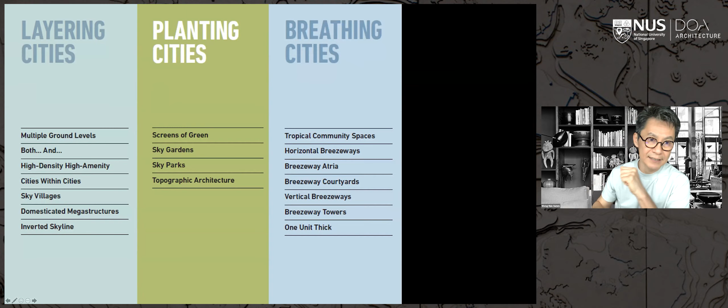Breathing cities is something I talked a little bit more about in the first lecture, that is how we create a breezy and pleasant microclimate within our buildings. We have quite a bit of this explained in the first lecture, but I will talk about breezeway courtyards later in this lecture.

But the last chapter, called Rating Cities, is very important to us. We created 5 ratios. We think these 5 ratios can have a catalytic effect on cities if we start measuring this. So often, we use ratios like GFA, site coverage, floor area ratio. These indexes are very often used, but they may be a bit more related to real estate, and they don't tell you whether or not the building is a good building, is a good city, is a good master plan or not.

So we thought about what we can actually come up with that hopefully developers and cities can adopt, and create an environment that encourages the purpose behind these ratios. I will show you how it has reflected in our buildings, but the good news is that such ratios have been taken up by a few cities in the region. In Taiwan, Taichung has taken up some of these ratios and it has had a very good impact on their cities.

Even in Australia, Brisbane is looking at some of these indexes and hoping to implement some of them to encourage developers to do good buildings. In fact, a lot of developers come to us because of these ratios, and they want to actually do good. So some of these enlightened developers are getting onto the bandwagon and wanting to do good for the environment.

Civic generosity is the more difficult one. It's about how the development encourages and facilitates public life in the city. Ecosystem contribution index is the degree to which development supplements the city's ecosystem. And the last one, self-sufficiency index, is a development's capacity to provide its own energy, food, and water.

This one is a very important one in today's climate, where we are going through a pandemic, where our supply chains are affected, we can't travel. The topic about whether or not cities and countries can be self-sufficient is something that I think has got heads turning and people discussing it.

So just to recap some of the projects I explained earlier and how they rate with our own ratings. We did these ratings also to push ourselves, so that the next project that we do must be at least better than the last. We don't like to stay put, but we like to always constantly push the agenda and do better. And so this was the basis for us to measure ourselves.

So this SOTA, as I mentioned earlier, what is interesting is that the community plot ratio is high because, as I was saying, this was a cheese building. We were creating a lot of volume, a lot of anti-mass, or negative mass, basically a lot of voids, and these voids were actually social condensers, learning and teaching spaces for the school. And you can see the percentage of it being 220%, 2.2 times over the site area.

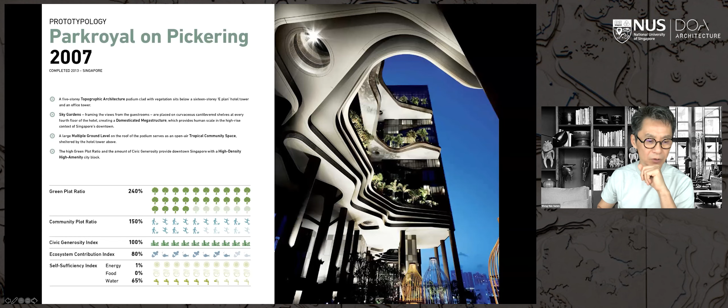So Parkroyal on Pickering, again, you can see the green plot ratio is very high. That's why it's quite a darling of the media for greening, not so much for sustainability, which is intended, but just integrated landscaping. There's a lot of greenwashing, and now green design seems to be an ism about how much green you can have in the building. And it's a bit disappointing. I do hope that everyone in this webinar understands that green building is about sustainability. It's a holistic, integrated, sustainable strategy that we are driving at.

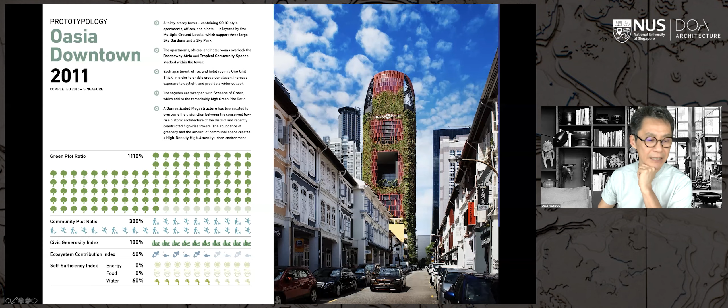And I think this is quite important because city planners crunch a lot of numbers. They tend to lack the three-dimensional quality of what buildings and architecture can contribute to the bigger picture, to the city scale. So one of the chapters in our book is called prototypology, where we see every building of ours as a new prototype. And when scaled up, it has a certain impact in the city.

So this is the Singapore Pavilion at the World Expo. It was meant to open last year, but due to the pandemic, it will open in October this year, in 1.5 months' time. It's almost finished. It's quite exciting. The greening is already in place, and it does look quite like this rendering. But what was the starting point? The starting point was really thinking about Dubai and Singapore. We are both man-made ecosystems, but we learn from nature, biomimicry, to create our own habitats, perhaps.

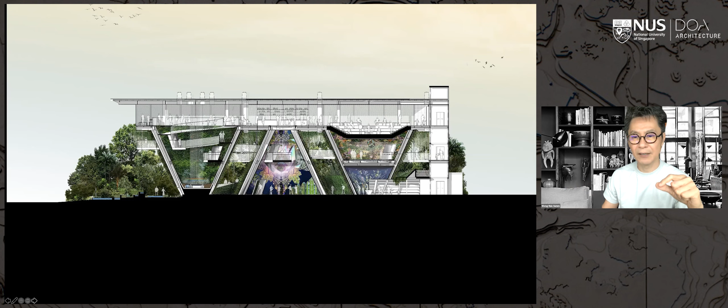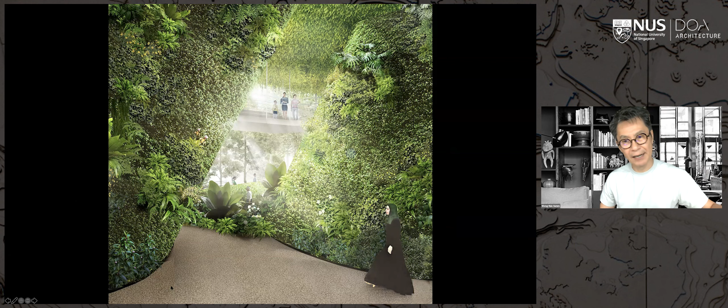But yet we actually created usable area on the top level, what we call the sky market, where Singapore communicates with the world. There will be an arena, there's area for cocktail parties and also general mingling around. So you will be walking into a 3-dimensional garden. You will wander around into 3 cones, and these 3 cones are a very innovative way in which we wanted to think about integrated landscaping.

We have inclined and natural sloping vertical green. We have green on the ground, but we also now have green on the ceiling. We are defying gravity by creating a 3-dimensional enclosed ecosystem of landscaping. And this is done through having the entire roof area in solar panels, indirectly creating the food, the sunlight, the energy for the plants through grow lights and using sun pipes.

So this experience that you will have of this small little oasis starts when you meander around the three cones and then takes you onto a canopy walk that will bring you around the cones into 3 different exhibits: a rainforest exhibit, then a city cone where we highlight some of the amazing things that we do in Singapore, and then a flower cone where we highlight the beauty of Singapore orchids. So this is the canopy walk. You'll be able to see landscaping engulfing you from the sides, from the bottom, from the top.

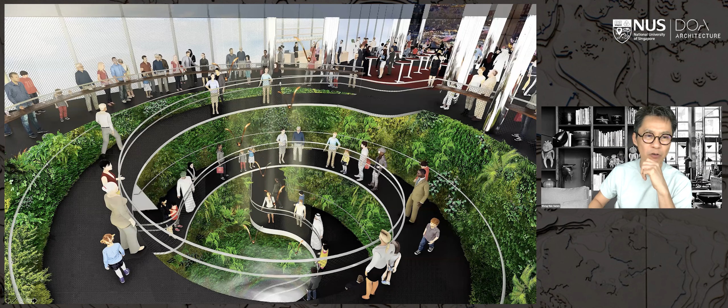And then through all this meandering through the 3 cones and the canopy of the landscaping, you arrive at this marketplace, which is almost the entire footprint of the buildable area as a usable space. So here you wind up. But what is actually impactful about this pavilion, because of the full coverage of the footprint of the building as PV panels, we are able to create a zero energy, zero water, and zero waste pavilion. Water is desalinated using the solar panels, energy from the solar panels, and complete recycling of the waste. Any food waste is going to be composted. Any other waste will be recycled, including the final disassembly of this pavilion.

But what is noteworthy is that we wanted to see if the ecosystem services of this pavilion, if scaled up, will make an impact in semi-desert and desert areas. So we are comparing against Dubai's natural sandy vegetation, and then with a typical local bungalow, which is about the same size as this pavilion, comparing the Singapore pavilion, and then scaling up to district level. So you can see the ecosystem services that the pavilion provides. It helps to purify air.

So if you see these indexes here, as a basis, Dubai's natural sandy vegetation is always 100%. Next to it is the local bungalow, how it performs, then our Singapore pavilion, how it performs, and finally, when it's scaled up into a district like the Palm Jumeirah, which is full of these local bungalows, what sort of impact it will have. So you can see the scores, we are doing very well. We exceed the ecosystem services of what Dubai natural sandy vegetation would do. The amount of oxygen too is almost twice of that.

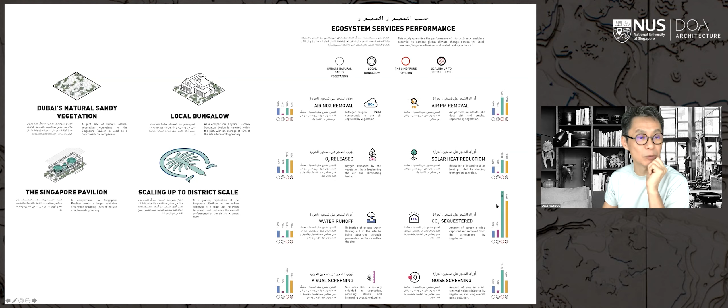Water runoff is almost equal to that. Visual screening, of course, is better. And solar heat reduction too, we are doing much better, almost twice. And the carbon dioxide sequestered is almost 700% of Dubai's natural sandy vegetation. And then, of course, noise screening, because of vegetation, it also helps a lot. The reason why it's less when scaled up is we started taking into account some of the precinct services like roads and M&E services. So the rating starts to go down a little bit, but not too much.

So we wanted to also explain, if we actually move this pavilion even to a further extent, what it can possibly do. There's a possibility that it will actually reverse desertification. There is science in it that with sort of reintroducing of vegetation, it's possible to increase rainfall by 30%.

And this is a bit of a summary of the good things at the regenerative scale that any cities, any countries should consider. I will not run through all of them, but some of the things that I think will be meaningful to discuss later is the densification by 3-dimensional planning. Half Earth is something that I'm quite interested in, which we started calling some of our cities and master plans 50-50 cities, in which we do think it's important for us to reserve and allocate 50% of land to be rewilded, to be for nature, so that the planet can regenerate.

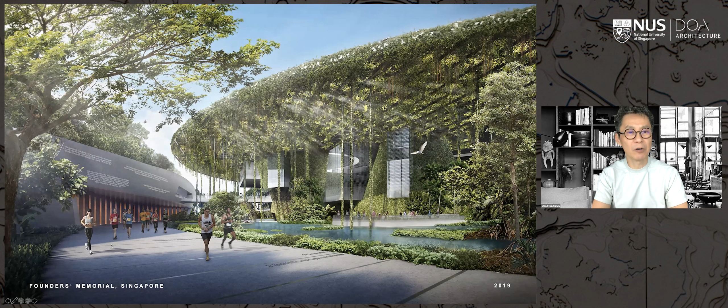I think the latest report by the UN is not very good. Man is responsible for what we are going through, the existential crisis, and if we don't act up now, it will only get worse. But if we do the right things and push the agenda, hopefully by 2050, there is still a fighting chance for the human race.

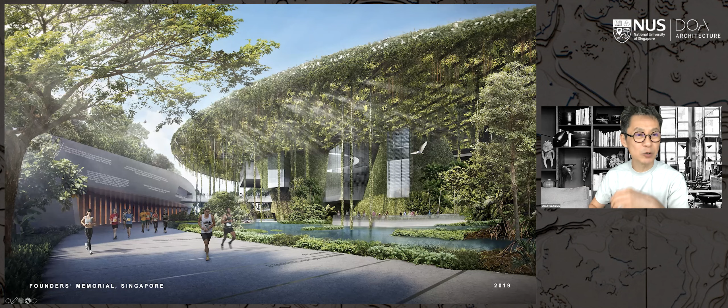This next project is something that I've never shown before. It's our entry for the Founders Memorial in Singapore, and it was a scaled-up version of the Singapore Pavilion. I wanted to show this primarily because it demonstrates how, if you look at something small, you can actually think of it as a scale-up project. So this one is almost 10 to 20 times the scale of the Singapore Pavilion. At the same time, we have been able to achieve zero energy with this building, and water is not an issue in Singapore. So I'll just run through quickly to show you what it can possibly look like if the pavilion has been scaled up.

The roof is entirely dedicated to solar panels. And if we think about the best and most efficient form of clean energy for the tropics and the desert area, it is certainly solar panels. And for the tropics, it needs to be on the roof because it's the most effective way. So that actually does inform your form, and it does inform how you would do three-dimensional planning. The top layer should always be reserved for producing clean energy.

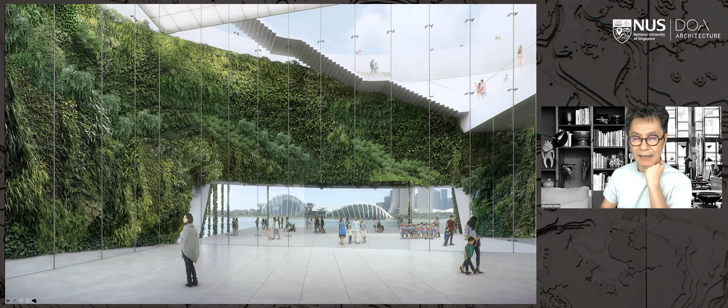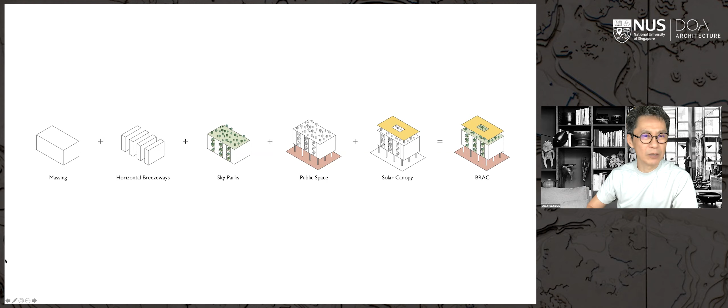So we almost achieved up to about 75% of the energy used through the solar canopy. But it's a combination of passive strategy and sort of innovative mechanical systems being adopted in the building. Most times of the year, particularly in the winter and in the cooler part of spring and autumn, you don't need any form of cooling. We can actually use the effective horizontal breezeway to cause an effective ventilation to the classrooms.

But during the summer period, we have come up together with Transsolar with a system that is actually a hybrid system where cool air is pumped in with elevated wind speed in the classroom, only using 40% of the energy compared to air conditioning. I think this is also used in the SDE building, and this is actually implemented here. So energy reduction is an important part of achieving zero energy as much as we can: to reduce the energy used in the buildings.

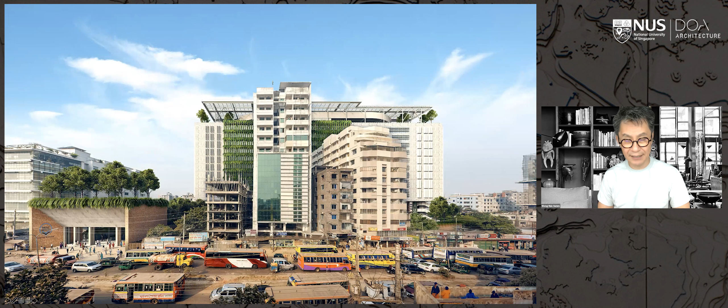But what is actually important about this design is our three-dimensional planning, the layering of different uses, and the club sandwich approach that we've taken. This is what Dhaka is like. It's pretty chaotic, it's bustling, it's very vibrant, and we wanted to create an oasis of calm in a very vibrant and busy destination, turning the ground floor into a community park for the people. And at the same time, as in SOTA, there are escalators and staircases that bring people into upper levels, which become secure and private academic spaces for the university.

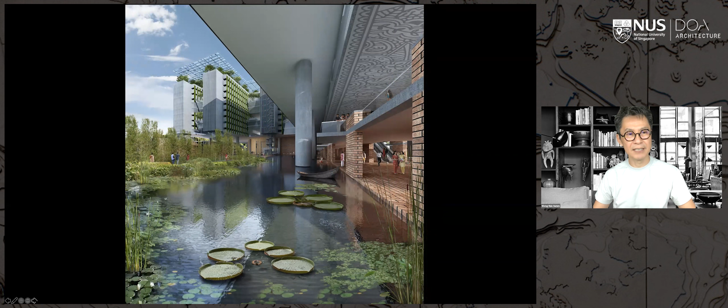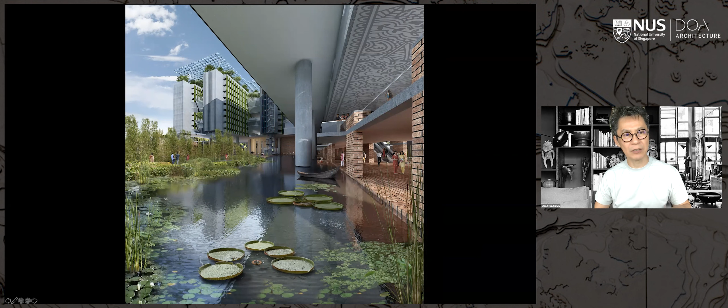So these are some of the courtyard entry spaces that bring people into the campus ground. And as you arrive onto the ground level, it's an oasis of calm. We are using a large water body, and this water body serves the function of cleansing the rainwater, and is also implemented as a grey water system for the development. And you can see from below, the solar canopy is almost the full extent of the building footprint. So this is the community park. We talked to the university, and we do want to encourage them to open it up and engage the community to allow people to use this space.

So in terms of a section, you can see on top the long section across one of the breezeways, how the escalators bring people to some of the important nodes, like the library, the canteen, the lecture theaters. And in between them, we also have staircases, bringing people all the way to the top where we have the swimming pool and the recreational areas. And below, you can see the short section, with the breezeways cut perpendicularly. It is actually a true space between buildings.

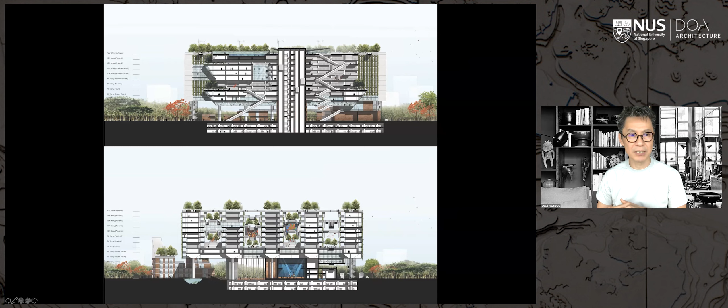We have created pockets in the roof to bring natural light in. So these long covered breezeways are not actually dark; they are all naturally lit. And you can see on the ground floor, it's got very little footprint. It is actually a very porous ground plane to encourage the community to use this park. So these are some of the social spaces in the upper stratum, the private and secure academic areas for the students.

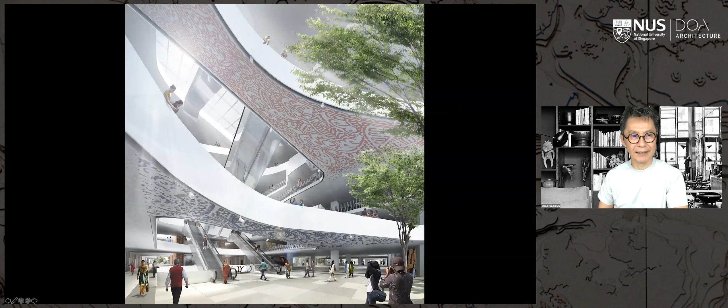And the escalators bring people up. Because of the number of students here, we needed to depend on escalators rather than lifts. As I mentioned in my first lecture, lifts are very antisocial spaces. Horizontal movement and escalators are something that we think will engender a better community spirit within the development and for the campus. And the upper stratum is really a bright, airy, breezy, new kind of environment for an inner city, a very dense city, yet at the same time creating the right quality of spaces, high amenity for the university.

This is a different project again. This is not going to be built, but this is an interesting one because it's all about transport and mobility. I think this is something that would be good for you as students to look at and maybe pick up some ideas, because it addresses mobility from fast to slow.

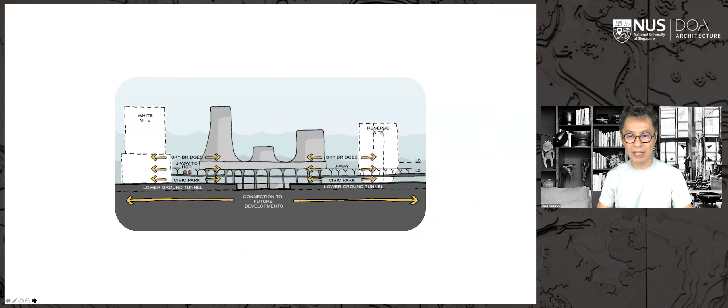So in terms of a diagram, this was how it would work. The lines are existing. We have to build on top of this, leaving these busy MRT tracks running all the time, but we erect the Land Transport Authority headquarters, and at the same time free up the ground level from vehicles, turning it into a community and civic park.

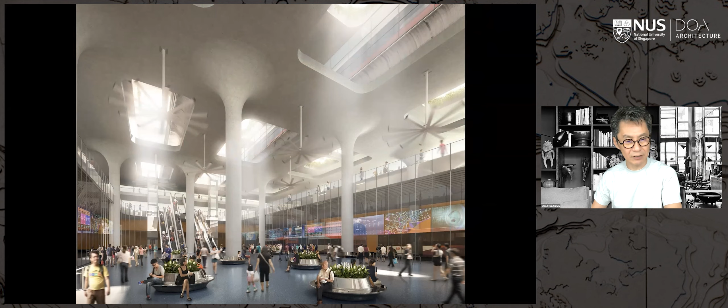On the upper level, it's a new ground level, which is an oasis of calm. You have another smaller community park on it. It also has a running track around the buildings, and all the buildings contribute planting all around, contributing a higher green replacement for this development.

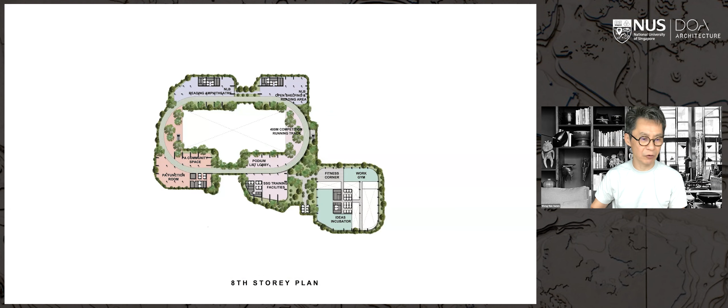So this is a typical section, cut across the 8th floor to show you how the running track is embedded in the towers, connecting all these various towers and all these stakeholders together using recreation. So you can see overall the running tracks around, but underneath is now turned into a community park for Jurong.

So this is a quote from Jane Jacobs. I think it's quite important, and I think this leads us to discuss more about mobility. What is important for us is how this is really a true transport hub: how this building can send out feelers to connect to all the precincts and to all the various major population nodes adjacent to this development, and also connecting Malaysia and our central business district area. And I'll show you how we did it.

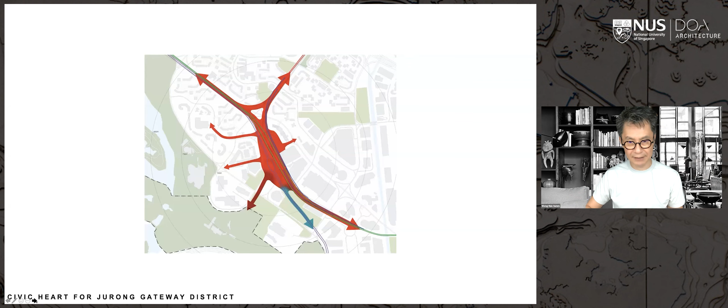So we realized that between Singapore's second CBD area and CBD1, we have what we call the railway corridor. All we need to do is actually to connect to it. At the same time, there's an elevated MRT line that runs all the way from Jurong to the CBD area. It joins up with the railway corridor and also another green spine within the city itself. So we wanted to make all these connections all the way to the south and also to the Jurong neighborhood as well.

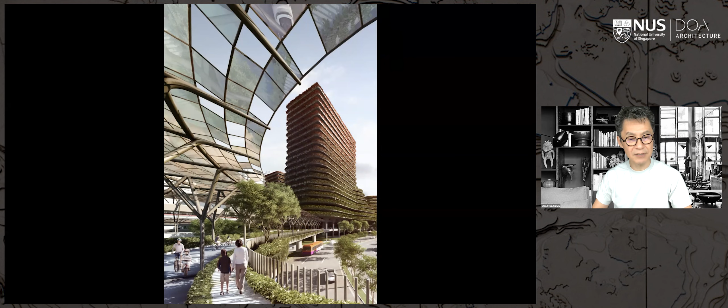So this is what we created, all these feelers that are for pedestrians and personal mobility devices, people using scooters, people using bicycles, and yet safe walkways for pedestrians, connecting people to the various neighborhoods. What is really quite nice about Jurong at the moment is what they call the J-walk, which connects all the buildings together. This is connecting to that network and creating a bigger network for pedestrians.

But now we decided to bring in medium mobility, where bicycles and scooters can be accommodated, and design viaducts for this mobility. I think we catered too much for fast mobility and for cars, but we haven't done enough for pedestrians and PMDs. This was one exercise where we thought maybe it's possible for us to consider building for it. As you can see, the roof structure over these mobility feelers is always covered with PV panels, increasing the surface area for solar panels to create more clean energy for the city.

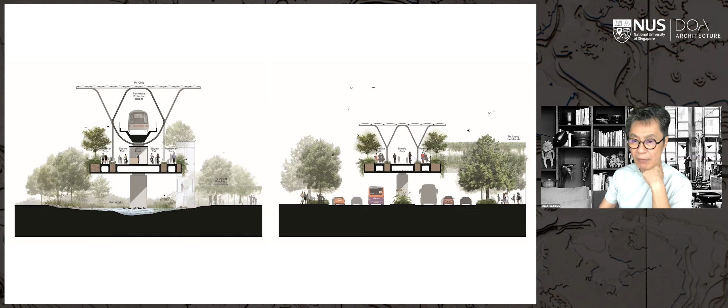On the right side is one dedicated just to bicycles and pedestrians. It is an overhead connection that links up various buildings, and you can join up as many buildings as possible, so it will connect as a network. It also works together with the ground level, which is turned into a park. And with the new JRL and the fast train coming in, all this will start to connect the entire district and the entire second CBD of Singapore.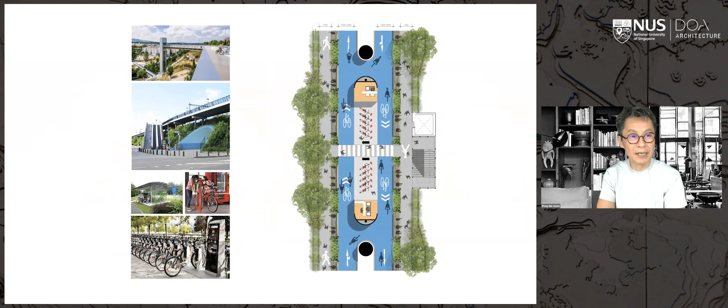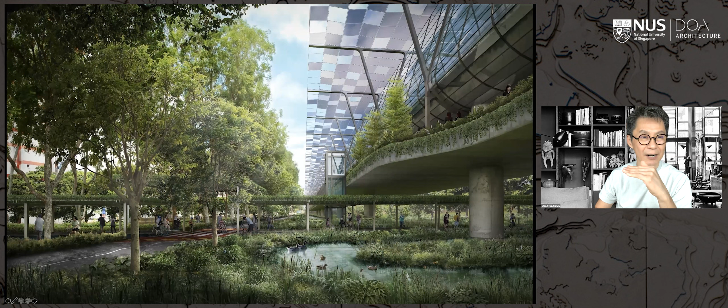So in terms of the plan, this is what we wanted to do. We wanted to create nodes that were mobility kiosks, where you can have shared bicycles or a bicycle repair kiosk. It will also be a little stop for cyclists. It could also have storage facilities and delivery facilities, all incorporated into it. At the same time, it separates vehicles from slow to medium mobility. One thing we were quite adamant about was universal access, so it's provided for by using lifts to bring people onto this mobility device.

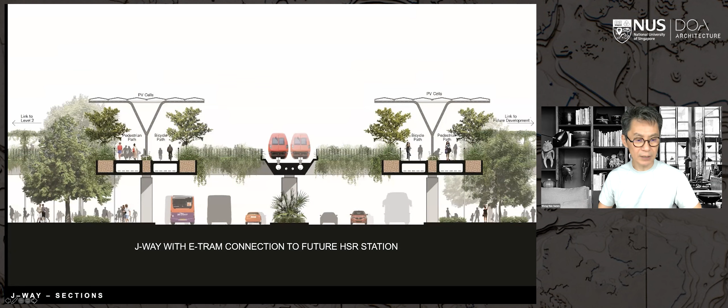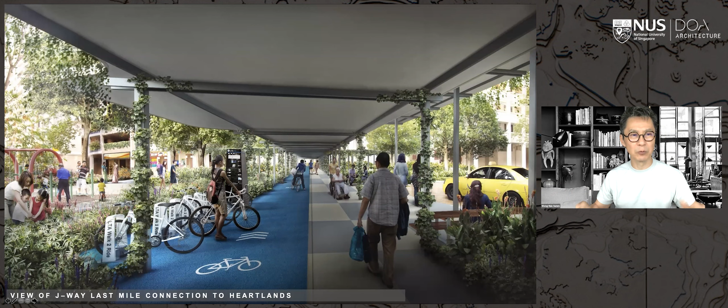And when it comes to the existing neighborhood, a series of covered walkways, reimagining how the landscape can have a more park-like ambience, and reducing the amount of car parking and roads we have in our existing urban fabric. Some of these were implemented in Tampines, as part of the exercise we did with NUS and with Minister Heng Swee Keat. Some of these little things are implemented, but not on a big scale.

Okay, another different kind of transport hub. Here you see is actually for Singapore's Mandai Resort. Currently it is under construction. This was a proposal that we did. We were not selected.

I think again, as most of our projects are always overly ambitious, most clients and developers tend to get frightened. But nevertheless, it does inform us how we can push the design agendas. When we do win it, we will implement as much as possible. But we do like to reach for the stars and do as much as we can. So when you start to cut it back, it still achieves a very high quality of our vision.

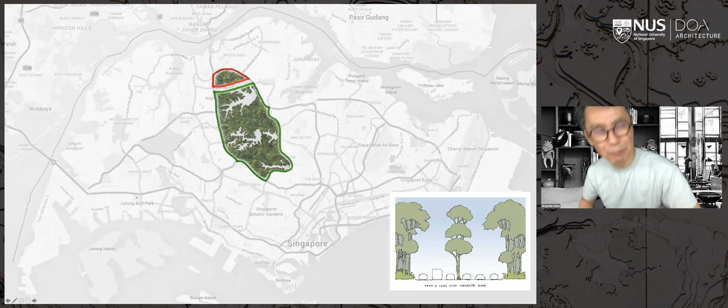So when we look at a bigger picture of Mandai, we realize that Mandai Road is now connected by highways. You hardly need this Mandai Road anymore. It's lost its purpose. You can actually move around using the expressway, and we wanted to downgrade this road and renature it into a very sensitive and friendly road that can be used to bring people here, but friendly for animals to cross at night, at any time.

Because one of the biggest problems about Mandai Road is the road kills, because there are fast-moving cars through it. So we suggested downgrading this road and turning it into only a two-way gravel road, and allowing the canopy of trees to be planted close to one another, so that the canopy can start to bridge each other, so that monkeys could swing from one tree to the other again. And then having the MRT station coming in underground, under the Mandai Road, to end up in the entrance facility.

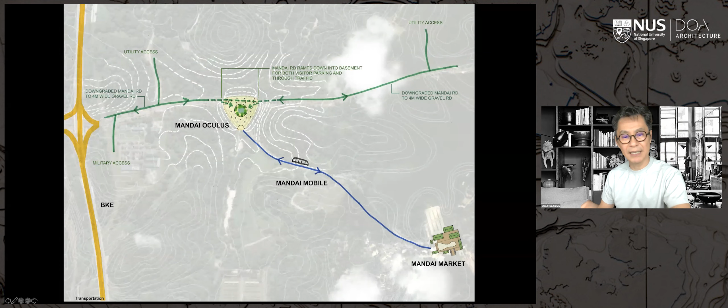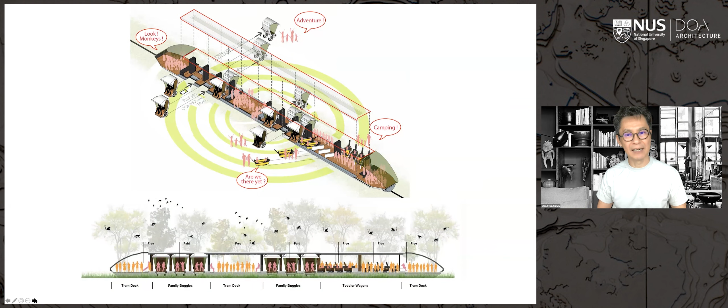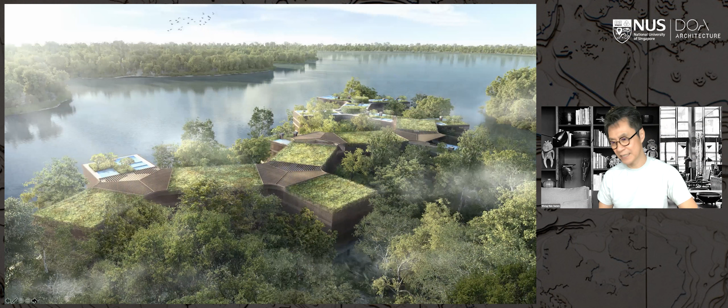And then we also did a scheme for a resort hotel within the development, and we call it the Hide, because we wanted people to hide from the animals, to be able to live in the environment, but not intrude into the realm of nature. This park is basically nature first, people second. So people are going to hide away from the animals and the insects.

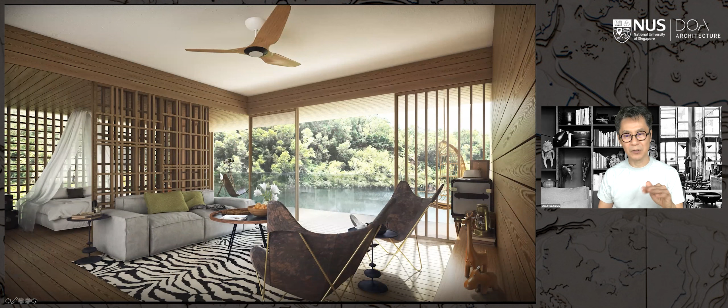And basically all the movement will be underground, and they only emerge into the building directly from an underground connection. And even the ground level is renatured as much as possible. It sits on pilotis, and even the facade of the building prevents animals from seeing what's inside. And you can from inside see out, but not disturb the environment. So this is from inside looking out. It has screens, so that animals hopefully will not be disturbed by this.

Okay, there's one chapter in a book called Self-Sufficient City. As I mentioned earlier, it's quite important, primarily because currently in our pandemic, due to the supply chains being affected, the topic of self-sufficiency is very important. We always think of how Singapore is a land-limited country and city. One of the most difficult things is how we create self-sufficiency in terms of clean energy. Due to the lack of land, this is one of the hardest things to do.

To be self-sufficient in water, I think Singapore is going to achieve it very, very soon. In terms of self-sufficiency in food, it's not difficult. Singapore's target is to achieve self-sufficiency in food in 2030. But if we scale up industrial food production, we can easily meet the target of self-sufficiency at any time if we are committed to spend the money on it, to create factories for food. But what is important is that we need to start thinking how to create enough horizontal surfaces to turn into PV canopies so that we can actually harvest as much clean energy as possible.

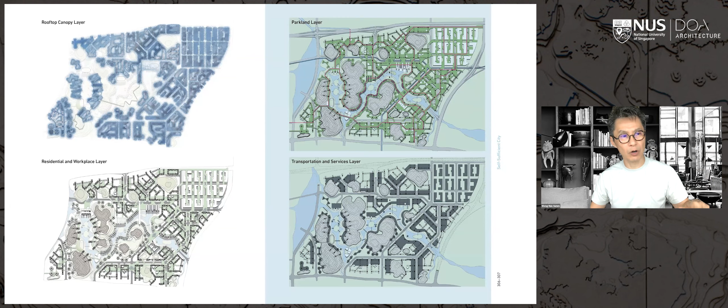So as a section, you can see how it works. Ground layer, an undulating terrain that meets the parkland layer, and then the buildings above, whether it's offices or residential, support the large solar canopy. And under the solar canopy, with adjustments of the PV spacing, we allow enough light to have 1 layer of commercial farms under the solar canopy. So we were able to also achieve 100% self-sufficiency in vegetables for the residents in this new town.

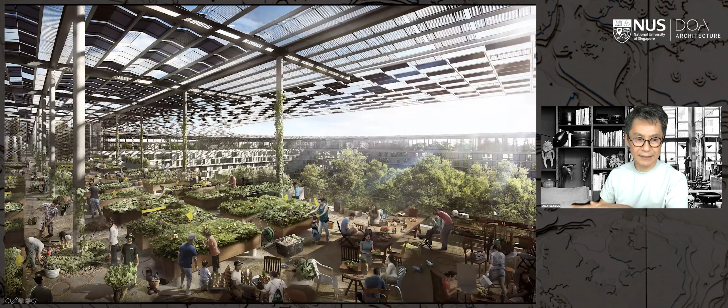So as you can see, how it's seen from the top, and then the farmland layer. And the ground layer, the community park layer, is for our pedestrians, and also for a new form of district mobility.

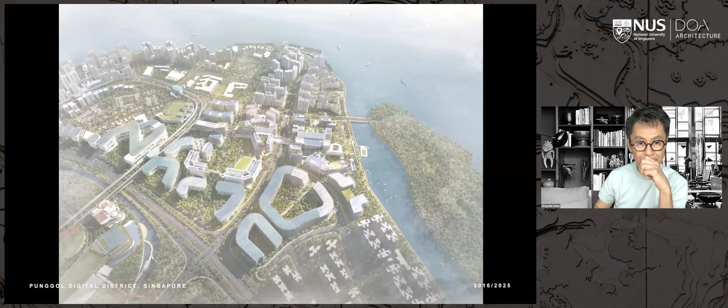This is the last project that I'll show you. This is scaled up even bigger. This is happening in Singapore, under construction at the moment. It's called Punggol Digital District, that includes Singapore Institute of Technology. We did the master plan of this whole area.

There's almost 20 hectares. And while we were not successful in the new town master plan, the Zero New Town master plan, we were commissioned to do this master plan for Punggol. So a lot of the ideas that we thought about in the earlier master plan are being implemented here. So I'll show you more about the implementation and talk through some of these implementation strategies that we have.

So this is where Punggol Digital District is located in the northeast part of Singapore. And there is a current population in Punggol that almost amounts to 350,000 people. But there is actually very little work in this area. So putting this business park at the university here provides a lot of work for the residents in this district, and making their commute shorter, and turning it into a 15-minute district.

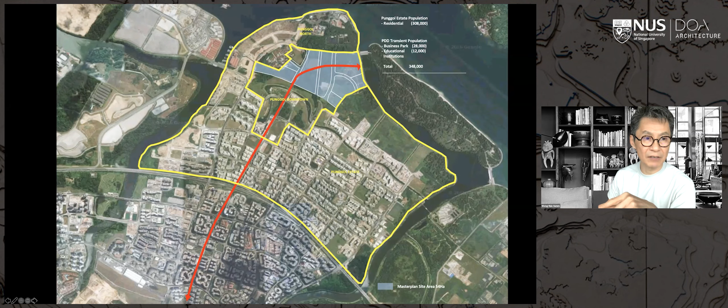So there are 2 important spines here. One is the extension of the MRT line, the northeast line extension terminating under the first phase of JTC Business Park. And the other one that is also an important spine is the old Punggol Road, or the existing Punggol Road, that will be turned into a heritage trail. It will be turned into a pedestrian pathway for the residents and for the community.

So this is the aerial view of the master plan and the business park, incorporating the university. Surrounding it in the north, in the south, in the west, and the east is all HDB housing estate. In the middle will be the university and the business park. There's a small pocket of residential, sort of landed residential next to it. It's basically made up of industry and also made up of education and a few reserve sites.

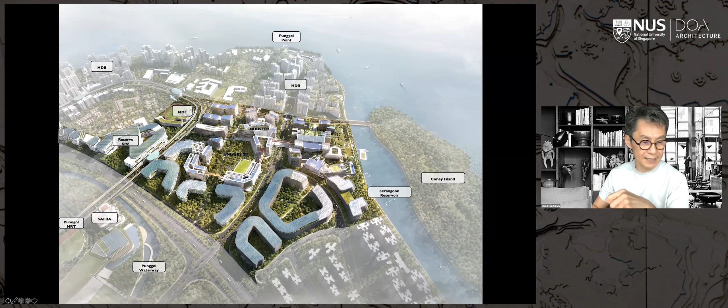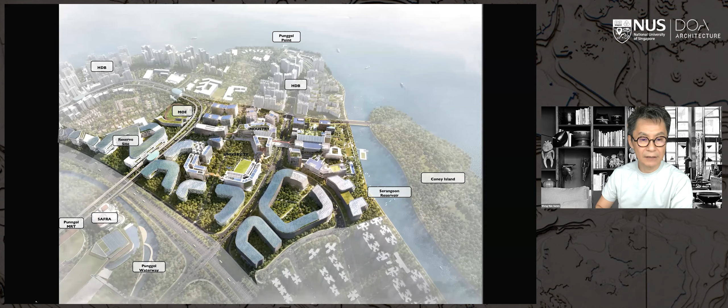So again, like the three-dimensional planning that we had, the lowest level, the ground level, or rather the subterranean level, is actually the vehicle and servicing layer. I'll explain more a little later about it. And then the next layer is a very pedestrian and community-friendly environment. It's the community park layer.

We have almost taken out all the roads from 20 hectares and turned it into a pedestrian park-like environment for the users and also for the community at large. And then we have above that, the academic and the office layers. And of course, on the very top, the tropical umbrella, having the solar canopy and also commercial food farms.

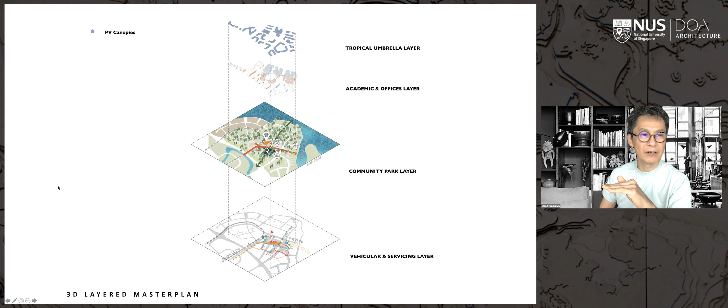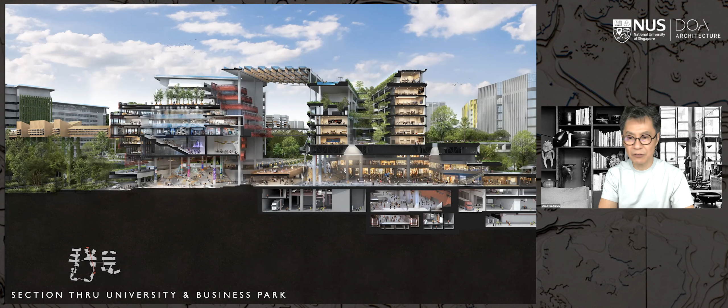And in the long section, you will see the basement is doing the heavy lifting for this master plan and for this new development, this whole area, because it will incorporate the MRT coming in, the future mobility, logistics, and the district services. And yet above ground is a park-like environment and aerial connections connecting buildings and verandas that will look into a community park.

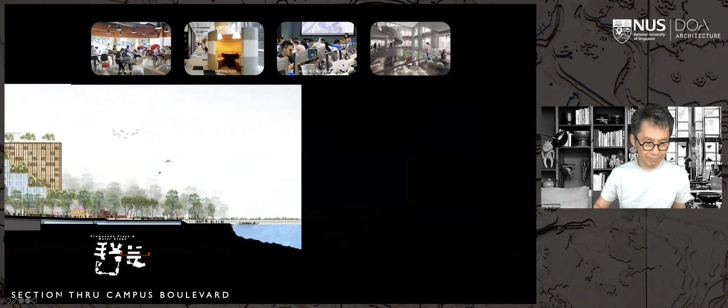This is the section cutting across the campus boulevard, which is actually the path of the MRT connecting to the development, and it's turned into a pedestrian-friendly pedestrian mall. And it brings people to the waterfront. At the end is Coney Island. So I'll just explain how we created a park, a sort of people-centric car-light district.

So in terms of a strategy, instead of your traditional city block, where you have all this network of roads, we went for a city block where we only utilize the existing road network, and the internal roads are turned into pedestrian walkways, and the connections that we need between buildings and entrances, drop-offs, are actually brought into the underground and connected between buildings, thereby freeing up the entire area as a pedestrian-friendly environment.

So by incorporating the MRT right smack into the master plan, it brings people from all over Singapore into this pedestrian-friendly environment, exiting the MRT directly into Nexus, into a park-like sort of ground plane. Also connected to it is the bus interchange, the extensive connection between all the buildings that's for use for servicing and also for car parking.

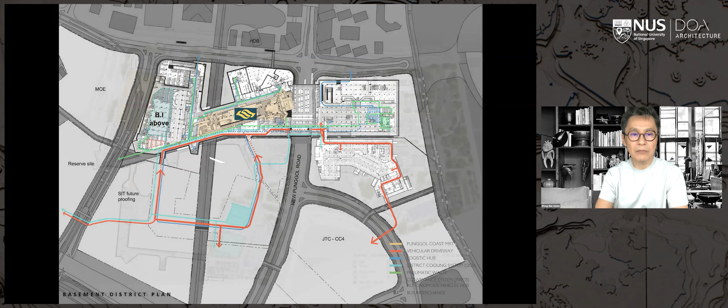So this is an undulating site. So the north area is the ground level where we have the Nexus and the bus interchange. And then the connection across to SIT, which is down south, is connecting all the buildings of SIT together. So basically, you don't see any roads on the ground level. They're all embedded in the subterranean.

So as I mentioned before, the basement is doing a lot of heavy lifting. We envision this as an underground subterranean structure, primarily because in future, a lot of the vehicles will be autonomous. You don't need people to drive them. You can actually drop off and then they find their way to park or they move out. The same goes for buses as well.

So in fact, we think that a lot of the energy usage can be reduced further in future when all these autonomous vehicles start plying the basement. We of course have the MRT coming directly into the development, but the main services accommodated in the basement are the district services. We have district cooling, we have a pneumatic conveying system, we have a smart grid, all the connections are made underground.

We have a centralized logistic hub where from all the ports, they'll bring goods to this area and then they'll be transferred into drones to be delivered to all the addresses in the development. It will be an autonomous vehicle hub. So some of the parking spaces for autonomous vehicles will be here. And also it connects to the MRT, the transportation nodes.

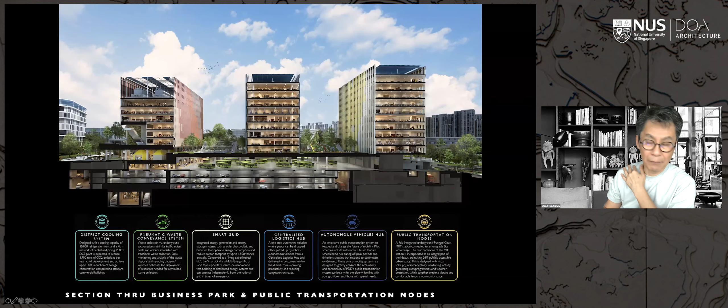There are also other facilities like substations and M&E services that are actually embedded in the basement. So it frees up the ground level; you don't have any more substations, they are all underground. So this is one of the renderings showing the MRT entrances connecting to the Nexus, a very direct connection, but also multiple uses again. All the staircases turning into event spaces and social spaces.

This is a community-centric district, and I'll tell you why. We studied the whole network of Singapore again. What is the pedestrian-friendly and bicycle-friendly network? We have the rail corridor, we have the Round Island route, we have the Kallang corridor, and we have an extensive PCN, all connecting around the four corners of Singapore.

And we actually thought we can have a new one. We call it the Punggol line. This Punggol line is going to be a pedestrian and bicycle-friendly line that will connect PDD to the Kallang corridor. And why it's important is because it caters to a very large community.

As I mentioned to you, Punggol itself has already got a residential population of 350,000 people. Sengkang has another 300,000, and then Hougang and down south. So we almost connect 1 to 2 million people within Singapore.

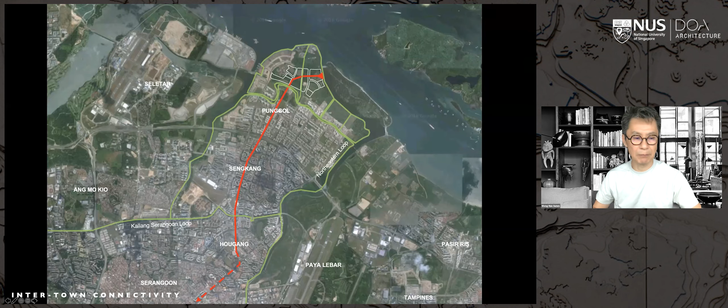And if we can create a cycling path, you could actually provide an alternative mobility system and network for Singapore and relieve people from driving cars, and also supplement the mass rapid transport system. So you can see this is a calculation of the population that we were able to service using this Punggol line.

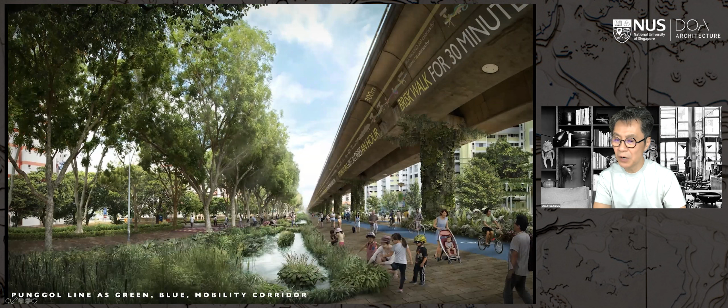And this is currently what is happening under the MRT tracks, which we wanted to convince the government to turn into a bicycle-friendly path that will connect people all the way to the Kallang corridor, turning into a linear park and connecting the community. And when we needed to go overhead, it becomes land bridges, commercial, linear overhead bridges where you can actually have people plying it.

You have bicycles, you have pedestrians, but you could also activate it by having kiosks and some convenience stores.

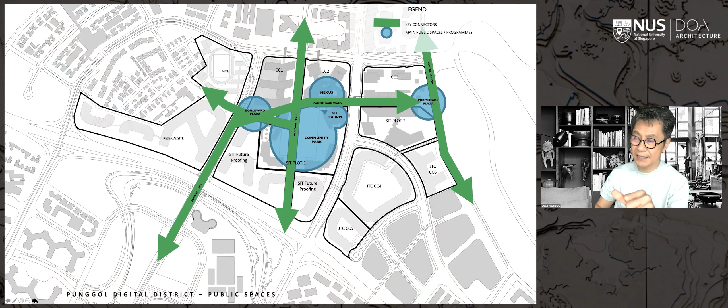So the other aspect of it being a community-centric development is the Punggol line, bringing people to the campus boulevard and then to the waterfront, and then intersecting with the heritage trail. So these pathways are curated with important nodes that will activate all the spines. We have the community park, the SIT forum, the nexus, the promenade plaza, and then the boulevard plaza.

So you can see these were the two paths in the master plan. This is actually phase 1. This is currently under construction. We are also building all the buildings except for plot 2 of SIT, but the rest of it is actually executed by us. So you can see there are major nodes, social enablers to activate this spine. You have the boulevard plaza, which is the entrance to the lower ground.

We have located the hawker center, which is an important, affordable food amenity for the residents and the community here. The bus interchange connecting to a community center and directly to the MRT and the nexus, and also connecting to the forum of SIT. And then towards the waterfront, you have retail F&B, a market village, and the promenade plaza. And this whole area, some 10 hectares, is very pedestrian friendly, and we have been able to create almost 3 hectares of park-like conserved forests within this master plan.

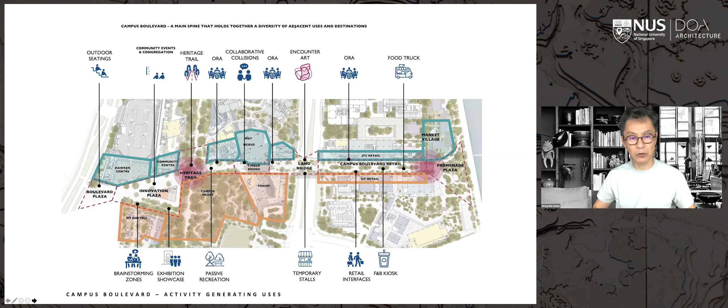So we curated all these kinds of activities, from outdoor sitting areas to collaboration, collision, we call it. We have encounters with art using the land bridge as an art platform. We have areas where we could bring in food trucks. We have temporary storage, temporary stalls and food kiosks, and even passive recreational areas, exhibition showcase areas, and also brainstorming areas for both the university and the industry.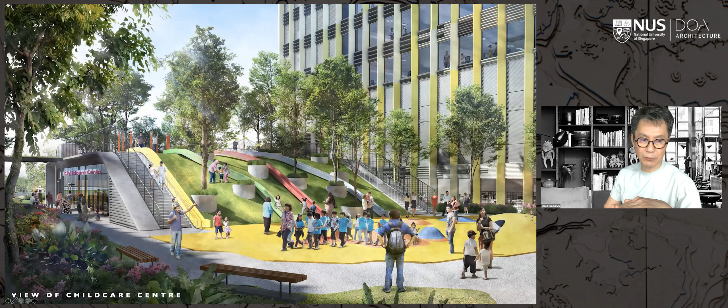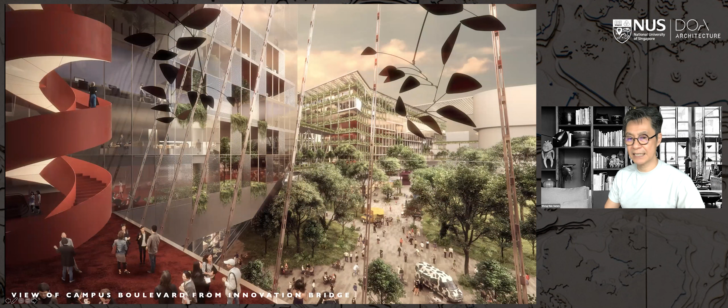So these are some of the renderings and images of the campus boulevard, starting with the Boulevard Plaza. It's a pedestrian-friendly mall. It's also the vibrant spine. Adjacent to this will be a childcare center and playgrounds, and the hawker center that I mentioned. And then covered plaza spaces next to the community center, the PA community center, where events can take place. And above that is a convention facility for the business park.

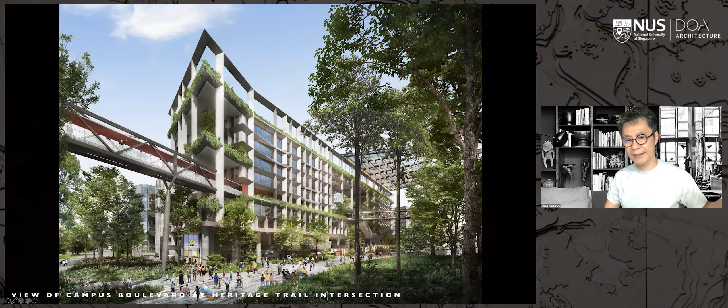And you see this collaboration loop, connecting all the buildings in phase 1 together. And you can see an enlarged solar canopy covering the connection between SIT and the business park, connecting two large nodes, the forum and the nexus, which will have a congregation of almost a few thousand people at any one time. So this is the nexus.

It's a multi-purpose, multi-use tropical community space. It is not air-conditioned, it's naturally ventilated. All the simulations were done. We'll show you later how this is a very porous space that allows breezes and cross-ventilation, and when there's no breeze, we have giant, high volume, low speed ceiling fans to move air around. And this is basically a multi-purpose space on top of the MRT, hoping that this could be an outdoor exhibition space, performance space, and also a commercial space as well.

And then adjacent to that, actually before I go on, you can see on the top right it's connecting across to SIT. And the next space that I show you is the SIT forum. So SIT will be connected directly through all these public spaces into the SIT Forum, which is an amphitheater, and it looks up to the SIT Library.

This is the other end of the campus boulevard, the retail and F&B section that brings people to the waterfront. And here we actually have a co-living space where we bring temporary residents into the area. And on the waterfront, there's a park-like setting, a market village, having retail F&B next to the waterfront to activate the waterfront as well.

It's important to think of design not just as providing the physical aspects, but to curate and think about the real estate and the commercial aspect of it, because without doing that, it is hard to think how to activate public spaces. So this is the Promenade Plaza, the waterfront, creating multi-purpose spaces for different uses: for performances, for boating, for bicycling, and also for F&B.

Okay, the next thing that is also important about this development is that it's nature-centric. Because of the heritage trail, and also a large part of it was fairly forested, we decided that we must try and save as much nature as possible. And at the same time, Punggol is a very dense place. It's high density and a highly built-up environment with very few parks.

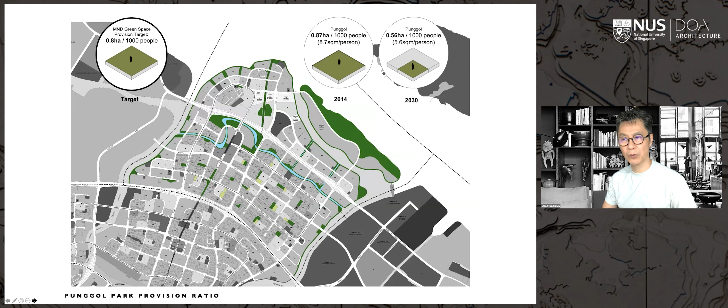Currently, you only have 0.87 hectares, but without what we were doing, it would drop down to 0.56 hectares per 1,000 people. And I think the target would still be to remain at 0.8, and hence in our development, we master planned a large portion of the heritage trail and the community park as a conservation area to conserve the large trees and nature within the master plan. In the original zoning plans, there was no consideration given to creating a nature space.

So we brought in Ramboll Dreiseitl to conceive of what we could possibly think about as a biodiversity network by connecting nature hotspots. And this is what we get as part of it. We have a community park, conservation of large trees, building sensitively, trying not to tear down as many trees as possible. We're keeping almost all the major old trees here, and creating canopy classrooms to bridge from building to building, giving students and the industry a different perspective of nature.

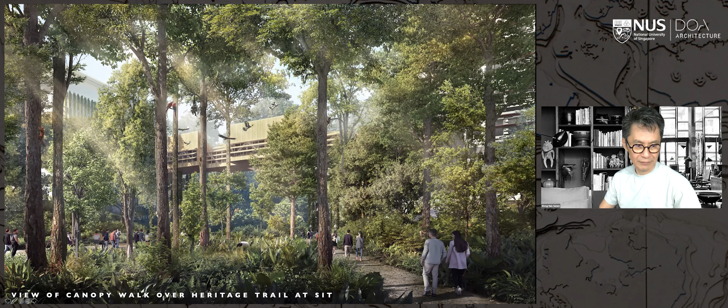And here is the repurposed Punggol Road turned into a heritage trail. It actually is in the middle of the master plan, but turned into a pedestrian-friendly, park-like environment. So in fact, when you walk this trail, you'll only see basically the forest and glimpses of the buildings.

But at the same time, this is a business park. It was envisioned as a vibrant industry and educational facilities. We needed to facilitate another system. And this is about creating vibrancy, creating industry collaboration. And we wanted to enable that through making connections between important buildings and hubs, important nodes.

So here you can see these are the first phase developments. All the buildings are connected on the 5th level through the canopy walk. The classrooms are embedded in this canopy walk. It connects to the innovation bridge. Then it connects into what we call the forest veranda, where we have collaboration pods.

And between the collaboration pods, there is a bridge that looks out into the park and bridges across the heritage trail. Then it connects to the waterfront parcels and also to plot 2 of SIT, where you have the major administration, the auditoriums, and the major canteen spaces for the university.

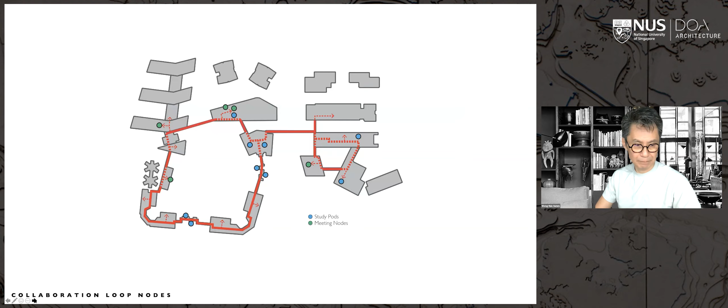So you can see here is the red loop, the collaboration loop, and how it actually plugs into most of the buildings. And as part of these collaboration loops, we have these interesting nodes, social spaces filled with nature and filled with collaboration pods and nooks and corners.

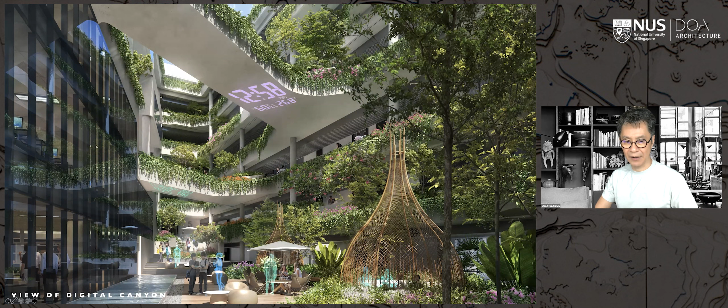And then into larger atrium spaces, and this is called the Digital Canyon. This is one of the main business park buildings of JTC, and in the middle of it is a central courtyard with a central focus, where it's being activated using F&B cafes and some other facilities enablers. It's actually quite important, if you create spaces like that, to also think about how it could be activated.

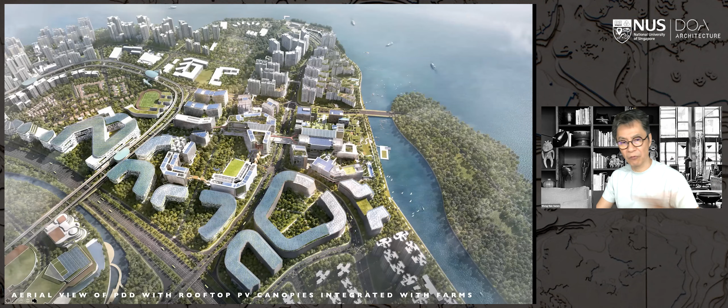So all the classrooms and also the business park look into a community park, a large forested area. It is also a resilient and productive district. And that's because of the last layer: the solar canopy layer and also the commercial farm layer. We have one layer of commercial farms. This is actually currently being studied and implemented. And also on top of that, a PV canopy.

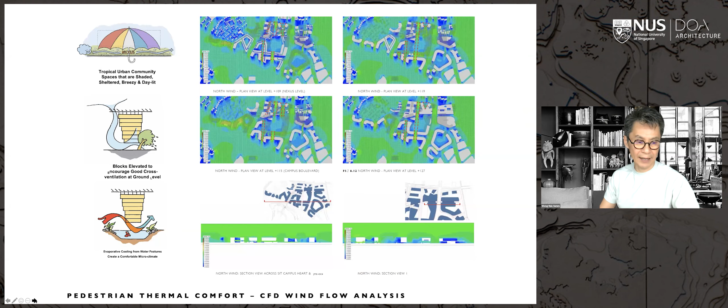This was the simulation that we did to justify our courtyard breezeway typology. The courtyard buildings are lifted off the ground and allow a very porous ground level for people and also for nature, and create enough cross ventilation and wind flow throughout the master plan. So you can actually see the lower levels have very good movement of air through the community park terrain.

And the ground level, you can see, is actually very porous, but we decided that we must have something to activate it. All the lecture theaters are basically on the ground level, and they are disguised as rocks, contributing a lot of vibrancy to the ground level as well.

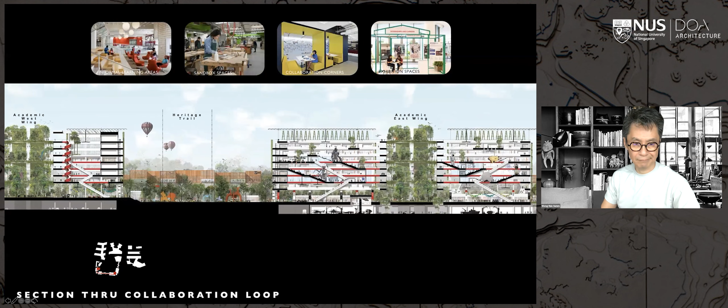And then SIT would connect to JTC. And there's a further scheme too, where SIT and JTC, the business park, exchange spaces, embedding the industry in the educational facilities, and the education side embeds into the business side to have better collaboration between the two major stakeholders.

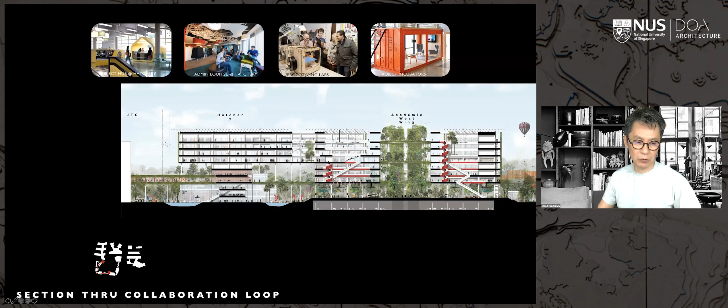So this again is looking at the top, and then looking at the commercial farm layer as well. That brings me to the end of the PowerPoint presentation.